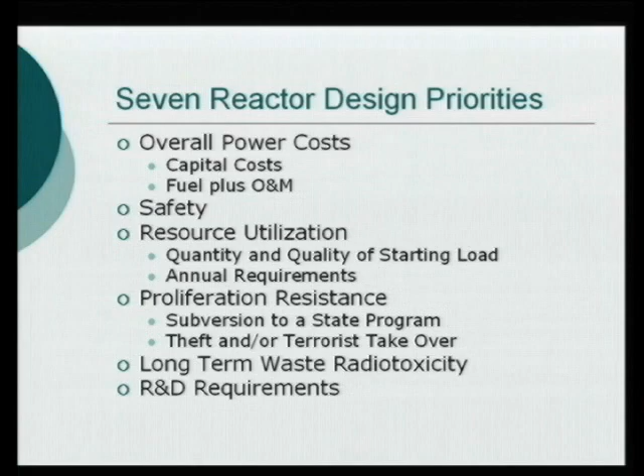How much R&D is required for a new design or getting a design up to code? And then what is the capability for rapid deployment? We need a lot of reactors. What can we do for that?

So the existing reactors, light water reactors, pressurized water reactors, boiling water reactors, and CANDUs - overall costs, they're very high, but arguably competitive with coal. The safety is good through expensive engineered sort of defense in depth. Resource utilization is moderate for startup. They're not too hard to start up, but they're very poor annually, and you need a lot of uranium dug out of the ground to support these.

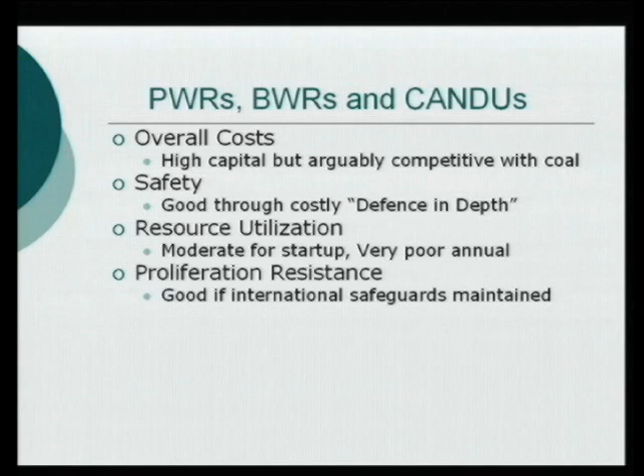Proliferation resistance is good through all the international safeguards we've set up. Long-term waste is very poor, especially the once-through cycle, which is the most economic and widely used. Very, very poor, sending a lot of radiotoxicity to waste. Even if they use plutonium recycle, that doesn't really improve things dramatically.

R&D, that's one area they benefit. There's very little that is required. Capability for rapid deployment, it's just not there. Even on labor alone, we couldn't get too many build programs going to really get enough of what we need. What about gas-cooled pebble bed reactors?

This is an area seeing more advance in recent years, and it is an interesting system. There's cost savings possible, but no real great reduction in overall complexity. They require a massive pressure vessel, and that really limits the size of the core and the power. So almost the same size pressure vessel as a pressurized water reactor for maybe a quarter of the power or even less.

The rad waste production is very similar to light water reactors, and also you've got radioactive graphite. It's not too horrible of stuff, but you've got that as an added bonus. The reprocessing of fuel in this design is extremely difficult, and that's part of the reason they say they're more proliferation resistant, but that means the uranium utilization has an even worse outlook.

From a safety outlook, they are excellent in decay heat management. They can get rid of decay heat quite readily, but that's only half the equation in reactor safety. The other half is criticality events, etc. And they're quite good on this, as any reactor is by engineered systems, but that is still a possible issue.

I have an asterisk here, with some extra comments below for people reading the slides later. One of the asterisks is that the reverse is true for accelerator driven systems, where you're keeping things subcritical by supplying neutrons from an accelerator. Yes, we can instantly shut that down. It helps a lot in criticality, but it does nothing for you in helping with decay heat management.

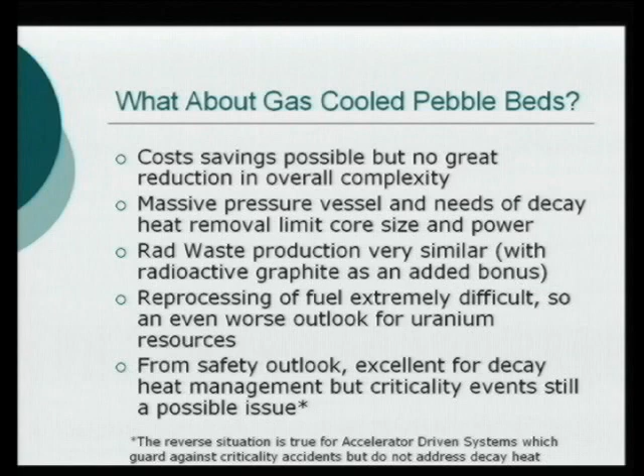What about the other Generation IV reactors? Generation IV, just briefly, was a program set up around 2002, a worldwide program to investigate what reactors we should be working towards in the long term. Pebble bed reactors was one of those.

Another is supercritical water, operating water at a much higher temperature than they're using now. It really only gives modest improvements, gives the thermal efficiency up a bit, but extremely challenging corrosion issues to solve there.

Sodium cooled fast breeder reactors have been around for a long time, with a few smaller ones or demonstrations built. In general, most would agree they're more costly and have higher safety concerns. We can make pretty much any reactor safe to the public as long as we have a nice containment vessel around it, but many would argue that these type reactors are more likely to have accidents.

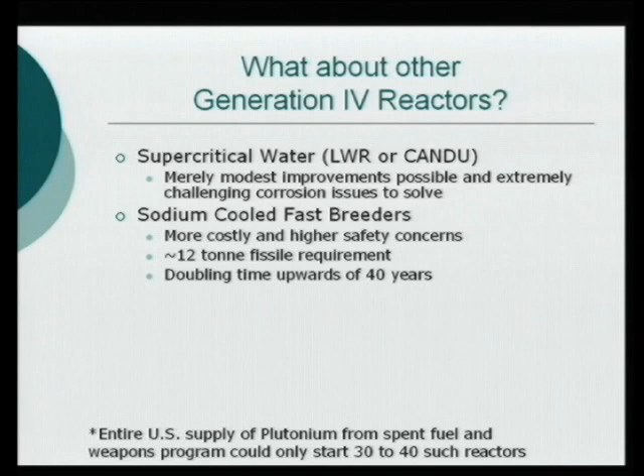They need a massive amount of fissile material to start, 12 tons of fissile material, plutonium, etc. And the doubling time, how long it takes if you breed fuel, meaning you're making more than you're consuming, would take 40 years on these designs to make enough for the next plant, so to speak.

Lead-cooled fast breeder reactors have some possible savings, they save an intermediate loop, etc., but they require even more fissile material. So I have an asterisk here that with that, like the entire plutonium supply of the U.S. weapons program, spent fuel, etc., that would only be enough for 30 or 40 reactors, so it really limits how fast we can develop these.

Gas-cooled fast breeders, that's one of the other Gen 4 reactors. That has a lot of similar issues here.

Now, what about thorium? We keep hearing about that. Thorium is more and more in the news, more and more in the conversation of the nuclear industry. Thorium is fertile on its own, but it can produce a fissile element, uranium-233, which is a really good nuclear fuel. It has numerous advantages, works well in any spectrum. We don't have to have a fast spectrum, or slow the neutrons down, like the uranium-plutonium cycle.

However, any use in solid fuels involves very difficult fuel processing. There's a lot of inherent radioactivity in things. It's very difficult to reprocess.

But what about fluid fuels? And what about the Generation IV reactor that was made for thorium? That is the liquid fluoride reactor. It's over 50 years old, but it's never really looked any better. And historically, this is called a molten salt reactor. I'll probably be switching a bit between terms here.

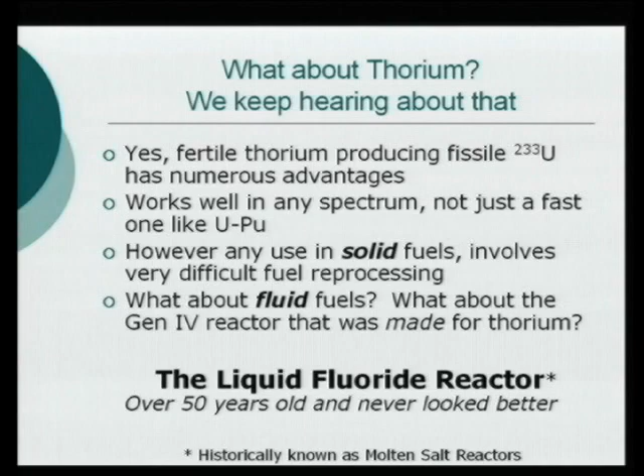The older term is molten salt reactor, but liquid fluoride thorium reactor, or LFTR, is a term that's becoming more used. So, liquid fluoride molten salt overview.

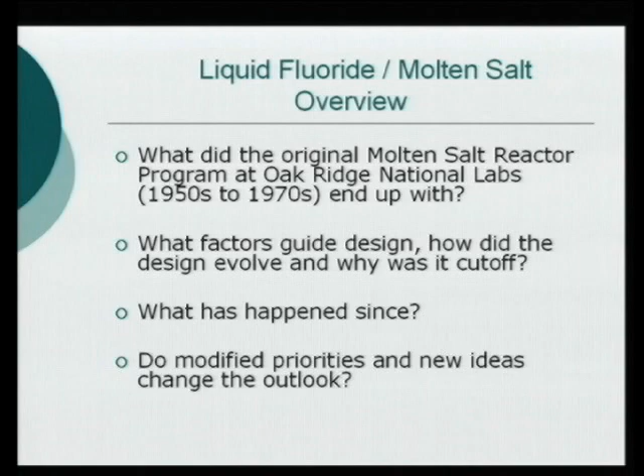What did the original program at Oak Ridge end up with, and what factors guide design? How did design evolve, why was it cut off, what's happened since then, and do new priorities and new ideas change the outlook of things?

Looking at what's called a traditional molten salt breeder reactor, this is a figure right out of the Generation IV program. Molten salt contains the fuel itself, and the fissile and fertile material flows through a critical core that has graphite logs, flowing between the logs, in and out of that core. It's only critical inside the core, so heat is generated in here, but that hot fluid comes out and goes through an intermediate heat exchanger.

That secondary coolant salt then drives either a gas cycle or a steam cycle. Originally it was a steam cycle, but we feel a gas Brayton cycle would be much more useful now. We show control rods here, but I'll talk a little later - you don't really need control rods in these types of reactors.

We can process out fission products to be able to be a breeder, or as I'll show in a few minutes, a break-even breeder. We can also dump these salts to emergency dump tanks very easily, either by valves, or if we do nothing else, we have freeze plugs that will melt if the salt starts to get hotter than we want, and drain to tanks that are set up to deal with the decay heat.

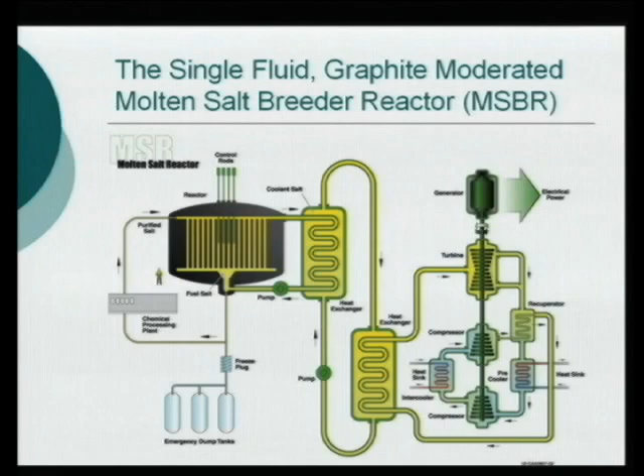When you shut a reactor down, that doesn't turn off all the power. There's so much radioactivity going on that there's a lot of power being generated, and we have to deal with that. That was the Three Mile Island event - the reactor was shut down, but they had to deal with that decay heat.

So the general attributes of this traditional design - it's called a molten salt because you have a mixture of, in this case, the fertile thorium fluoride and uranium fluoride mixed in a carrier salt of lithium fluoride and beryllium fluoride. That lithium has to be isotopically enriched, which makes it a little expensive, but not too bad.

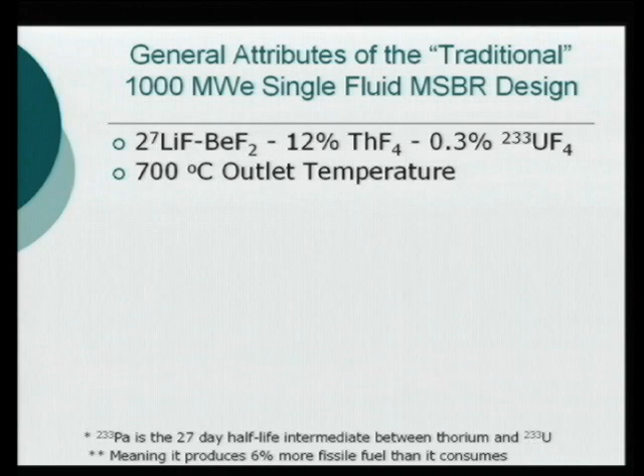It has a nice high outlet temperature of 700 degrees, so we have a nice high thermal efficiency. Oak Ridge work was over 44% on the steam Rankine cycle. If we switch to a gas Brayton cycle, like helium or even supercritical carbon dioxide, we can get up to the high 40s. The fission products in this case were removed on a 20-day cycle.

Some were moved a little quicker, some a little slower, and I'll talk in a minute about how a lot of them come out automatically. Now protactinium is sort of the intermediate between thorium and uranium-233. Thorium becomes protactinium-233, and that will decay to the thing we want, uranium-233, in a 27-day half-life.

We often need to remove that protactinium for this design, which is a bit of a problem here - you want to take it out of the neutron flux so it doesn't take another neutron and fail to become what you want. I'll talk more about that a little later.

It has a very low fissile inventory. We talked before about like 12 tons, 20 tons - this is only 1.5 tons, or 1,500 kilograms, for a typical gigawatt or 1,000 megawatt size plant. It has a breeding ratio of 1.06, which is modest compared to the fast breeder reactor, but you don't need to breed much fuel to start your next reactor.

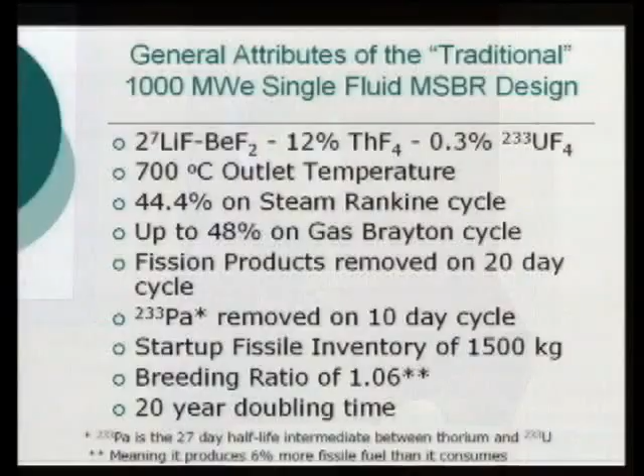So the fuel you burn in a year, which is about 800 to 1,000 kilograms, you sort of end up with 6% more than that at the end of the year. That gave a 20-year doubling time, which back when it was in competition with fast breeder reactors was not as good as the fast breeders - but we had to change the fast breeders later for safety reasons, and they're nowhere near as good as 20 years anymore.

General benefits of any molten salt design: volatile fission products, gaseous fission products, things that want to come out of the salt will come out as we're operating, and we simply collect them. The most important thing is xenon - it's a gas that really just loves to absorb neutrons.

We really want to get rid of that—it's quite radioactive, so we remove it. It just comes out of the salt, and we assist that by bubbling helium through the salt. So if everything that wants to come out of the salt we take out continuously and store safely off plant, away from the reactor, if there is any kind of major spill it just solidifies. There's really nothing that wants to come out of there, so it's hard to imagine ways we could really spread any radioactivity around.

The salts have a very high boiling point, and we operate them at low pressure—there's no pressure vessels here whatsoever, it's just a big tank basically. Any temperature increase instantly lowers the reactivity, which is a very good safety feature. The fuel salt's at the lowest pressure of the circuit, which is the reverse of a pressurized water reactor, where at every stage things are trying to get to the outside world, whereas here the radioactive salts are at the lowest pressure of the circuit.

We don't need control rods or burnable poisons, etc. There's almost no excess reactivity, so there's no danger of accidentally pulling out control rods—there's none in there to begin with. And we have that simple freeze plug that melts upon overheating and just drains things. So there are lots of inherent safety features here.

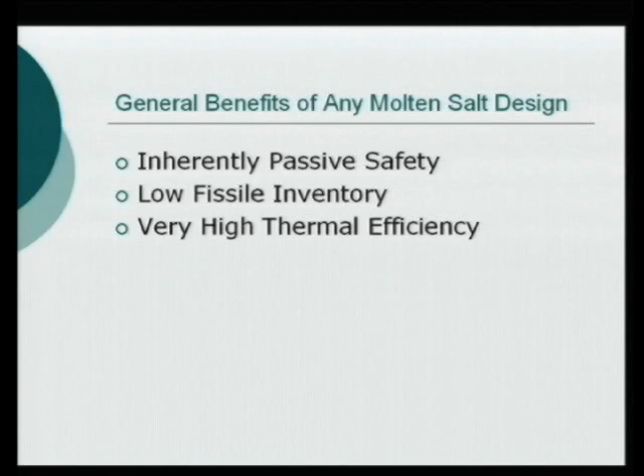So the general benefits: inherent passive safety, low fissile inventory, very high thermal efficiency, and they're ideal for dealing with TRU, transuranic waste. We can get rid of the more nasty aspects of those, which I'll show in just a second—they're a perfect system for that. It's very hard to get rid of transuranic waste in other designs.

And when we have the ability to use the closed thorium cycle—just very briefly, thorium becomes U-233, and U-233, when it fissions, can give a little bit more than 2 neutrons per fission. And if we don't waste too many of those neutrons, at least one of those neutrons can go to making another U-233. And if exactly one goes, we break even, and we're creating as much fuel as we're burning, so to speak.

Thorium is dirt cheap, extremely plentiful. So if we can close the cycle here, we get down to about 800 kilograms a year. That's maybe $40,000 to $50,000 worth of thorium for a plant that's generating revenues of maybe $500 million a year worth of electricity. So it's just a drop in the bucket.

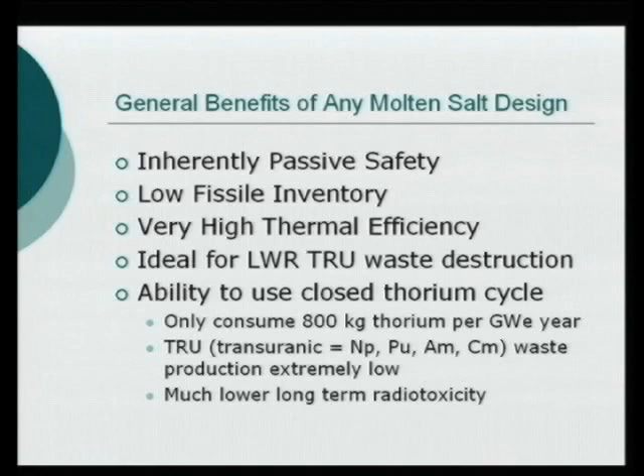The transuranic waste in general is produced at a much lower rate, and it's much easier for us to just keep burning those off within the reactor, so we get a much, much lower long-term radiotoxicity. That's what I want to talk about for a minute now.

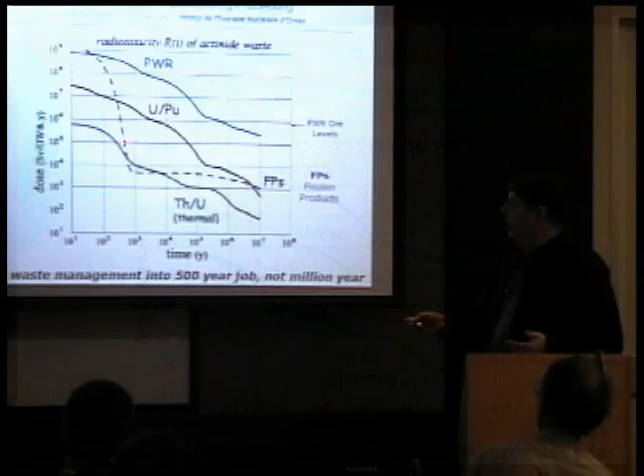This green line shows what we can get with a molten salt reactor, or liquid fluoride. We're not producing much—we only have maybe 10 to 20 kilograms in the salt at any time. So when we reprocess, we put that back in. Now, anytime you process things, you have to assume you might lose a tiny bit, and 0.1% loss is a very conventional rule of thumb for losing things to waste. But since we're only processing kilograms per year, we get a very low radiotoxicity.

Whereas a fast breeder reactor, even with the same loss rate, they're processing tons per year, so they will not be that great. Now, they hope they can do even better than 0.1%. In practice, especially the more famous integral fast reactor, they've probably never really done much better than 1%. They hope they can do a lot better than that, but they're starting with a lot more

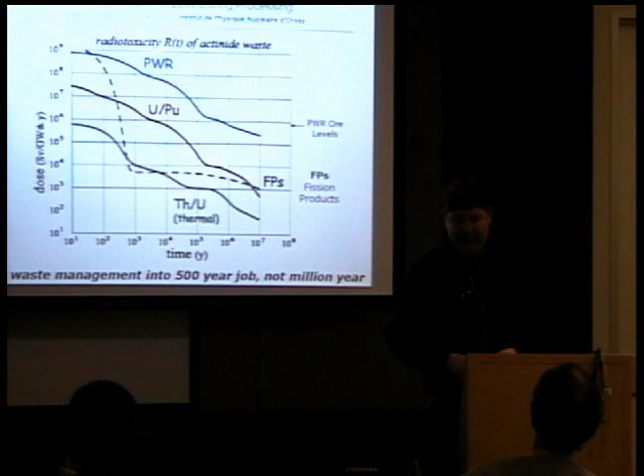radiotoxic actinide waste to begin with. So it just shows that with a molten salt reactor, where we put the plutonium, etc., back in the reactor to keep burning it off, we're turning the waste problem into more of a 500-year problem than a million-year problem. And we can engineer things that won't leak for 500 years quite easily, as opposed to trusting that we can do that for millions of years.

Now, proliferation resistance—that's a very important question, and a lot of people have different opinions on this, but it's an extremely important one to talk about.

On the pure thorium to U-233 cycle, there is a lot of proliferation resistance built in already. There's always going to be a lot of an isotope called uranium-232. It's got a moderately long half-life, so it sticks around, but it gives a really strong gamma ray from one of its daughter products. That's really hard to shield. It makes it very easy to detect if someone's trying to smuggle it around. You can't really shield that out—it's such a high energy gamma ray. This makes illicit use extremely difficult and highly detectable.

There's never been any national program based on making weapons out of U-233, even though yes, it's technically possible. And it would also be extremely hard to imagine how you could steal from reactors where the salt's never less than, say, 500 degrees Celsius.

A colleague of mine, Kirk Sorensen, also made a great suggestion here: if you're using the pure cycle in a molten salt reactor, a liquid fluoride reactor, we can instantly denature that. Uranium-235 or 233 are both materials that can be used in a weapon, but if they're mixed with enough uranium-238, natural uranium, they can't be made into a weapon.

So we could keep uranium-238 as a fluoride on standby, and if anything goes wrong—inspectors lose contact with the reactor—that can very quickly be dumped into the salt, making it useless for weapons, and you can't really start up the reactor again.

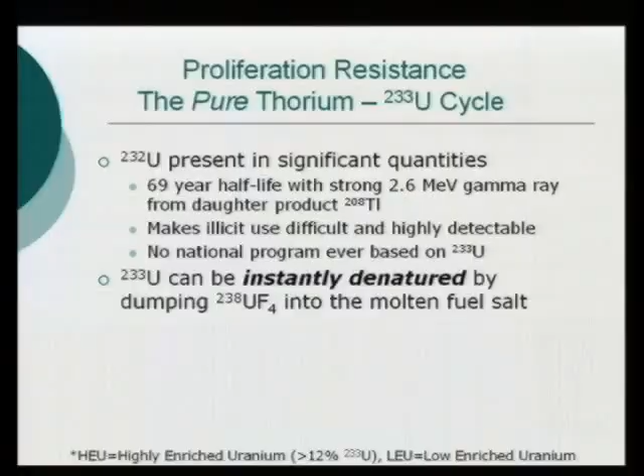Now, protactinium removal can lead to clean uranium-233, so if we can, we really should try to avoid this. Because if it's becoming U-233 just from storage of protactinium, it doesn't have this U-232, or very, very little of it.

So that's an important point. There's only very small amounts of plutonium in this cycle, and it's extremely poor quality. You could really never make a weapon out of it.

Now, we can also denature these cycles, meaning we run them with enough U-238. We still want to be majority relying on the thorium part of things, but we put in enough U-238 so that any uranium you could take out, you couldn't really use to make a weapon.

Because the pure cycle does represent what people call highly enriched uranium, and for a lot of people, as soon as you say that word, it's a no-go. So running the denatured cycle includes having enough U-238, and it does mean there's more plutonium present, because that U-238 can start becoming plutonium by absorbing neutrons. But it's still very poor quality, and plutonium is a lot more difficult to remove from the salts than uranium is. In many designs, it will also affect your conversion ratio.

Conversion ratio and breeding ratio are sort of the same thing—it's how much fuel you're making per fission.

So looking at the quality of produced plutonium, weapons grade is almost all Pu-239. Reactor grade is only about 60% that. One of the basic things that gives a lot of protection here is that Pu-238 generates a massive amount of heat because it has a fairly short half-life. In reactor grade, it's 1.3%, which makes it very, very difficult, but not impossible, to make a weapon out of reactor grade.

For a denatured molten salt cycle—and this is from what we call a 30-year once-through converter design, which I'll talk a lot more about later—it has massive amounts of this Pu-238, and a lot less 239, etc.

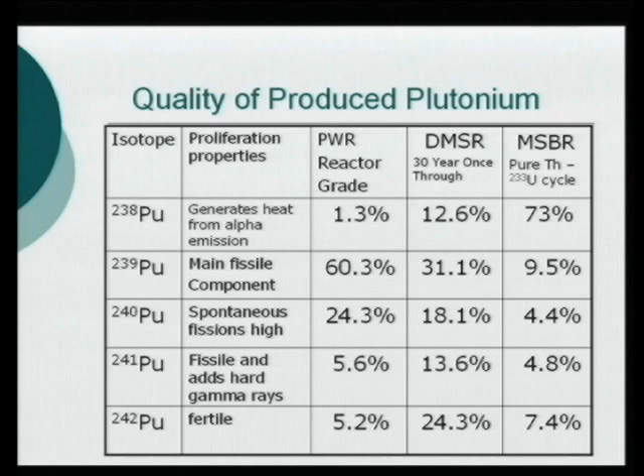Technically, it would still need to be guarded, but it would be next to impossible to make a weapon. On the pure cycle, you do have U-233, but the plutonium produced is basically worthless—it's almost all Pu-238. The material would probably melt if you tried to put enough together to make a weapon.

Now, some problems specific to the single-fluid molten salt design, where you mix thorium and uranium in the same fluid, graphite moderated. They had a fairly high power density, and graphite has a limited lifetime depending on power density—about 4 years—so we have to replace that graphite every 4 years. Fuel processing is also hindered by the chemical similarity of thorium and the most important rare earth fission products that need to be removed. There was also a problem with the temperature reactivity coefficient that was recently discovered.

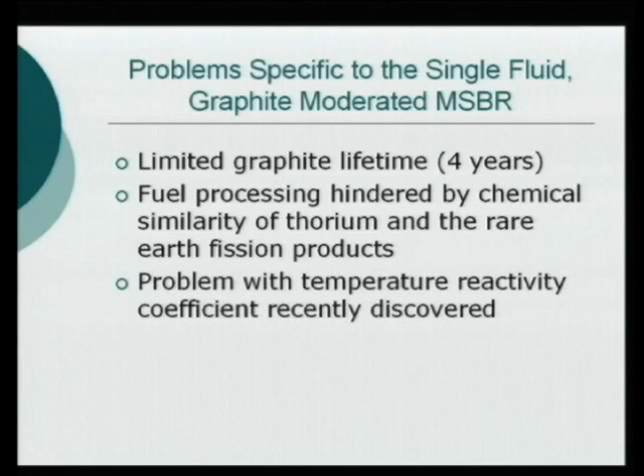It's quite simple to work around, and no problem with some of the ideas I'm going to talk about today. Protactinium separation does add a unique proliferation concern, which we'd like to get rid of if possible.

Some design basics: two-fluid versus single-fluid. Single fluid is what we call traditional, but for most of the Oak Ridge program they were trying to do the two-fluid design, where you have a separate fuel salt containing the uranium-233, maybe a little thorium, but by definition the two-fluid has none, and then a blanket salt that contains the thorium, catching neutrons to convert fuel for you. The advantage is that with no thorium in the fuel salt, it's much easier to process for fission products.

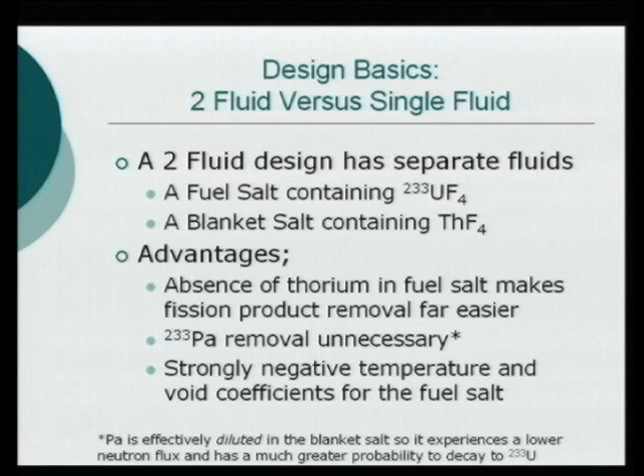PA removal is not really necessary here—there's an asterisk I'll describe. How many neutrons you lose to protactinium depends on power density, your neutron flux. The thorium, though, sits in a much lower neutron flux, or we can just have a lot more blanket salt, effectively diluting it, so we lose a lot less. There's really no need for protactinium separation, which is a pretty complex thing to do.

It has a very strongly negative temperature and void coefficient for the fuel salt, which is also very good. There are also converter, or once-through, designs where we're basically just mixing low-enriched uranium—uranium that can't be used to make a weapon—with thorium in a single fluid. There's no need for any processing of the fuel salt whatsoever for the entire life of the plant.

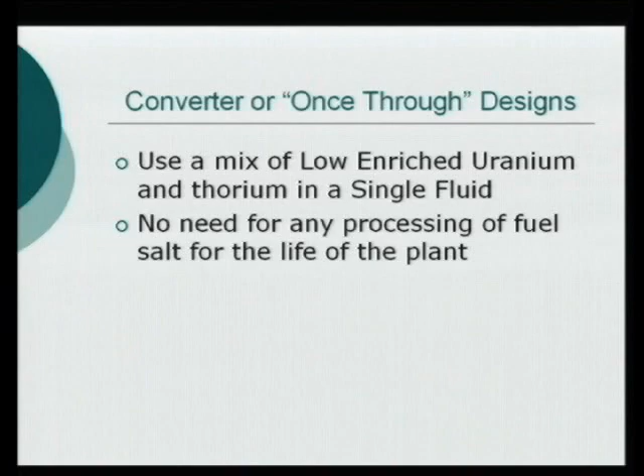We're not able to break even—we have to dig up more uranium every year—but much, much less than other conventional reactors. Just on design basics here: choice of neutron spectrum, a harder, faster spectrum, because we can modify this almost as much as we like.

With a harder spectrum, losses to fission products will drop, so we can maybe leave them in much longer. Prompt neutron lifetime is shorter, which is a bit of an issue for control, and it typically requires a higher fissile load to start these up.

A softer spectrum is basically the reverse: we can get that fissile inventory really low, but losses to fission products are higher, so we might need to remove them quicker. We can't really have any extra structural material—most designs don't have any at all, just graphite and the salts, and graphite is very good with neutron absorption. The prompt neutron lifetime is much increased, so things can happen slower here.

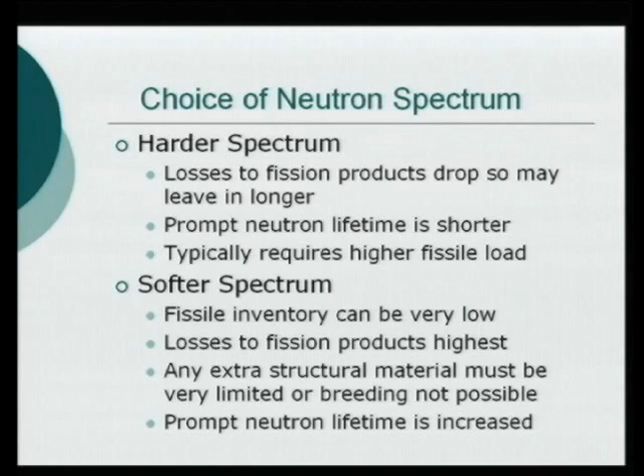Fuel processing basics: fluoride volatility is a process that removes uranium from the salt—a very simple process. Fission product removal is essential if we want a breeder or break-even design, but even for break-even we can go several years. Some French studies have shown up to 20 years before removing fission products. Protactinium removal and hold-up is essential for single-fluid designs that wish to break even, but not really for others.

With fluoride volatility, we simply bubble fluorine gas through the carrier salt, and it converts UF4, which is dissolved in the salt, to gaseous UF6 that we can convert back later. It's an old process we've known about since the 50s.

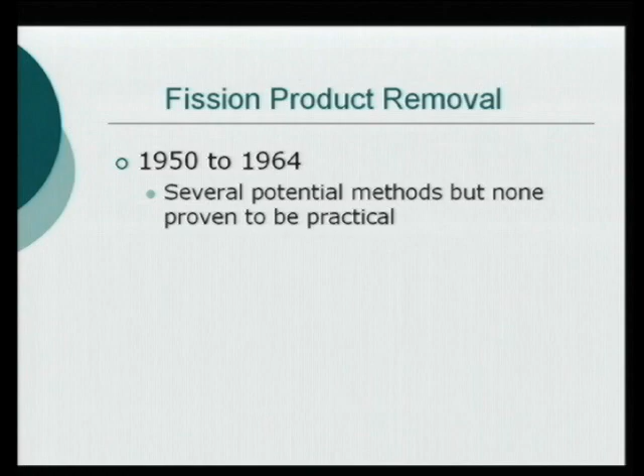For fission product removal, historically in the early part of the program from the 50s to early 60s, they didn't have any one method they thought was great—they proposed many, but none yet proven practical. There was a big breakthrough in 1964 called vacuum distillation. It's a very simple system: every day you take a little bit of the salt away and put it in basically a still.

The fission products themselves give enough heat to keep it really hot, and the carrier salt will evaporate away. Before you put it back, you take any uranium out, then evaporate out the carrier salt, recombine those, the fissile U-233 and the carrier salt, and put them back in the core. That gets rid of most of your fission products, and especially your rare earth fission products.

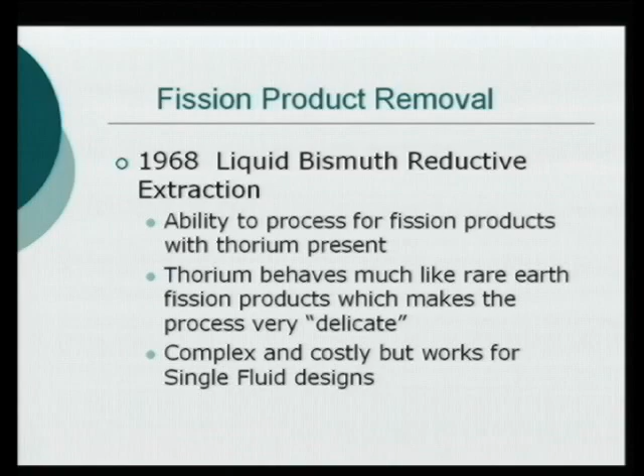The problem is if there's thorium in that salt, it's going to stay with the fission products. So this was really only viewed for a two-fluid design. Later, in 1968, they developed something called liquid bismuth reductive extraction. I won't get into details, but it does have the ability to process the fission products with thorium in the salt. But thorium is so chemically similar to the rare earth fission products that it makes the process very delicate, requiring many stages to do properly. So it's a complex and costly system, but it does work for single fluid designs.

So, fuel processing summary here. For two fluid design, we've got all kinds of choices. We can use vacuum distillation, something called salt replacement I won't get into, or the liquid bismuth extraction, much simplified to one stage because we're not worried about that thorium. We can also skip protactinium removal altogether because it's in that lower neutron flux blanket. For single fluid designs, you're sort of stuck with one method, and it's hard not to get into protactinium removal. If we have converter designs, or burner designs, we've got no fuel processing whatsoever, just simple chemistry control.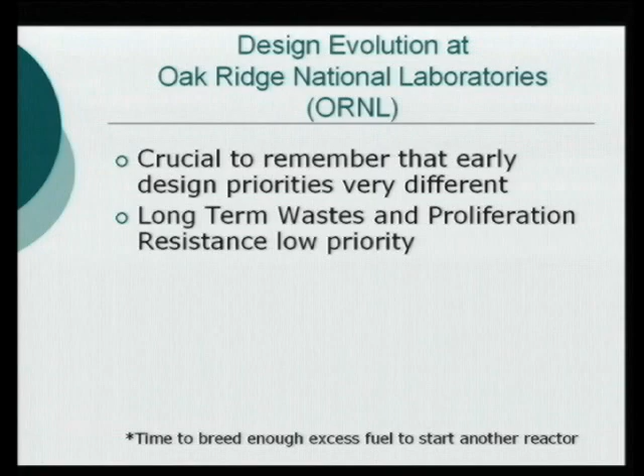Looking at the evolution here, it's crucial to remember they had very different design priorities in the early days. Long-term radioactive waste and proliferation resistance weren't really part of their mandate - they didn't have too much concern there. Back in the 50s and early 60s, they really thought we had very little uranium in the world and would run out quickly, so we had to get breeder reactors going and breed enough fuel to expand the fleet. They thought they'd have thousands of reactors worldwide by now. That meant short doubling time - how long it takes to breed enough fuel for your next reactor - was a very top priority.

The molten salt reactor program was in competition with sodium-cooled fast breeders, and back then they thought they had a really good doubling time. They don't think that anymore, for safety reasons.

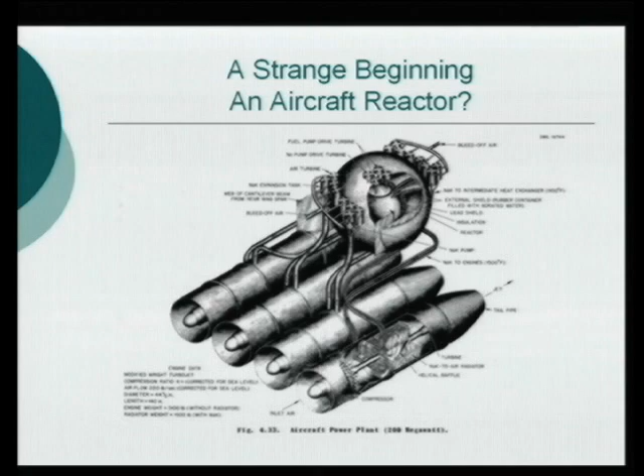Looking at the program, the strange beginning of this was an aircraft reactor. They didn't make anything that flew, but just as the Navy was sort of the birth of the light water reactor - the pressurized water reactor that was the best thing for a submarine - they thought a molten salt reactor would be a great way to have a bomber that could fly around for months on end, replacing combustion heat so there's no jet fuel on board. Extremely challenging project, to say the least.

It did lead to a very interesting test reactor built in the 50s, with very high temperature operation at 860 degrees. It had beryllium oxide as a moderator, sort of canned in material, and a different carrier salt, sodium zirconium fluoride. It pointed the way to possible power reactors, though even the original idea was probably quite far-fetched, in my view at least.

Now, what I call the rise and fall of the two-fluid reactor. Two-fluid was the focus for most of Oak Ridge's program, and in the late 50s they looked at what we call homogeneous designs - no graphite or anything, just the salt itself. They looked at both converter designs and breeder designs. The carrier salt does provide a significant amount of moderation, slowing those neutrons down, so we can actually play around with the spectrum quite readily. All these studies used spherical geometry, and they always had a wall, a Hastelloy N.

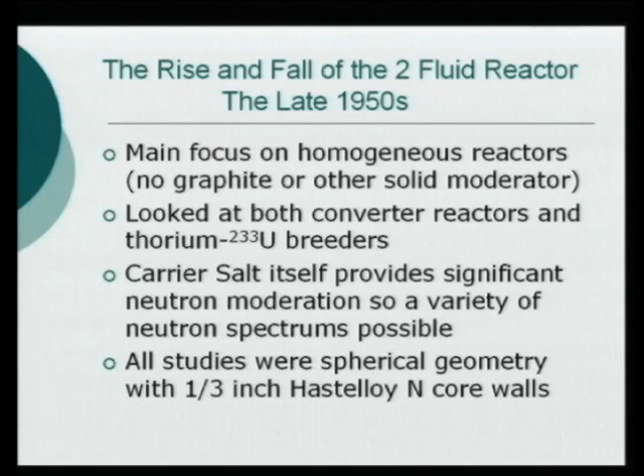Maybe we can improve the alloy, but nonetheless, a very nice little design. In the early 60s, though, they proved that we could use graphite with these systems, and that can lower the fissile inventory, so there was a switch in focus.

Okay, we're going to go to graphite moderation, but we still want that two-fluid design because it's so much easier on processing the fission products. Now, the simplest way you might imagine building this is a central core that just has the fuel salt surrounded by a core that has the blanket salt. The problem with that, though, is the critical radius of that inner core would just be too small. It would be on the order of about a meter with the concentrations of fissile that we would put on these salts. That's just too small, not enough volume to have a power-producing volume.

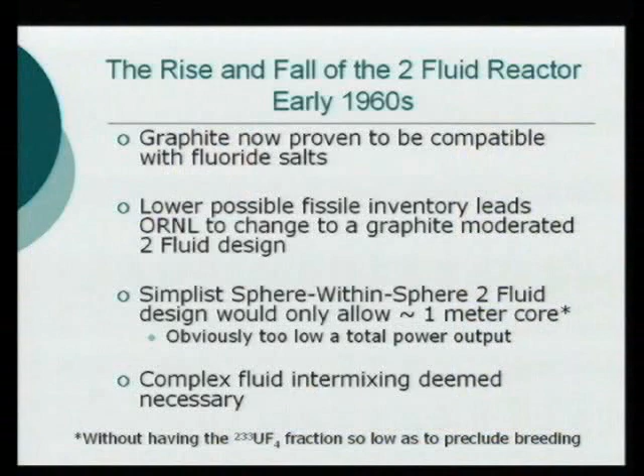So Oak Ridge's solution was, well, we're going to have to mix these salts, not together, but have two salts in the core separated by plumbing, graphite plumbing. Now, that intermixing of fuel and blanket salts done by graphite plumbing does give you the ability to have large core diameters and adequate power production, but that graphite, when it's under neutron radiation, first shrinks a little bit and then starts expanding. And that's changing the ratio of the blanket salt and the fuel salt. It's just giving all kinds of problems. And that plumbing was so complicated as well, any sort of one crack would basically mean replacing the whole core.

They have found some issues with that hastelloy, that high nickel alloy metal. One with a certain fission product that was getting into the grain boundaries, and another with neutrons that can make helium inside the metal, and that helium gets to grain boundaries and gives you problems. But later on, they worked with alloys and mostly resolved those issues, though not 100%, and we could definitely do more now.

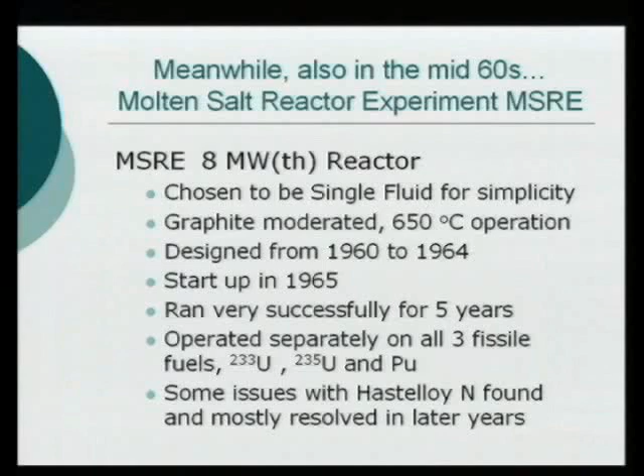Now, 1968 is what I call the start of the single fluid era. That new extraction method, even though they knew it was going to be quite complex and quite expensive, not as expensive as solid fuel processing, it works with thorium in the salt. The two fluid concept was abandoned, and that plumbing problem was left unsolved. Pretty soon after that, major funding for the molten salt breeder reactor program was canceled, and the R&D extremely limited until quite recently. And this two fluid concept was largely forgotten.

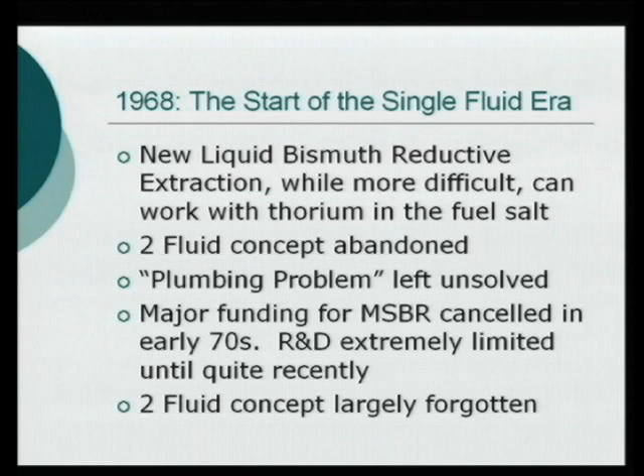Now, why was the program canceled? This was obviously going to be speculation. There's a lot of reasons here. First off, what did Oak Ridge do right? First off, they looked to go to the thorium-uranium cycle instead of uranium-plutonium. That's the fast breeder cycle. There's no need for a fast spectrum, a lot less radiotoxicity, etc., a lot more resources of thorium. They brought all the top minds together in one place.

Fast breeders and a lot of the other designs were working sort of piecemeal, some at Argonne, some other places. Everyone was together in Oak Ridge working to this. It really reinforces all the efforts. And they kept reactor safety at the forefront. There's inherent safety features of these as opposed to engineering safety. In Oak Ridge, they had a lot of voices in the early safety discussions saying we have to really be worried about events of low probability.

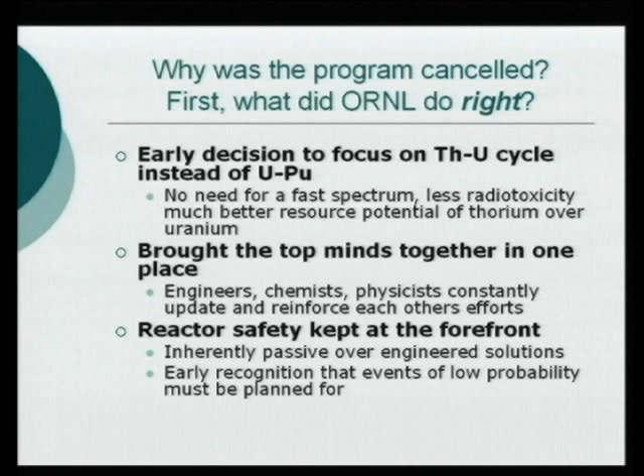What did Oak Ridge do wrong? Well, it turns out it's a lot of the same things. They decided to focus on the thorium cycle, but in the 50s to the 70s, production of plutonium for the military was a top priority for the government as well, and by extension, the Atomic Energy Commission, which controlled reactor development. They brought all the top minds together in the same place. That meant that all around the country, elsewhere, Argonne, everywhere else, they really knew very little of the molten salt program, and government relies on the opinions of experts from around the country.

Reactor safety kept at the forefront. Alvin Weinberg was the director at Oak Ridge, the inventor of the pressurized water reactor actually, and he raised the ire of AEC's infamous Milton Shaw by raising safety concerns about pressurized water reactors.

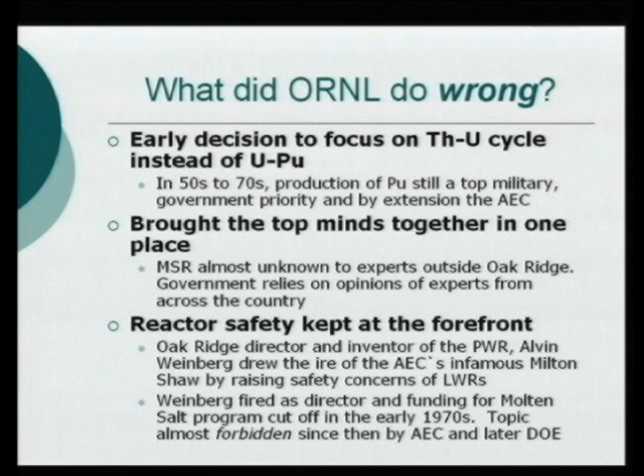Soon after that, he was fired as director and the program was canceled. Not necessarily that those two are directly related, but most people feel it is.

What's happened since then? In the late 70s, Oak Ridge kept things going with almost no funding, so not much good engineering work was being done. They started to focus more on denatured designs with U-238 present, either as converters or breakeven systems. They showed, even surprising themselves, that you could break even with a design that had U-238 present, so the uranium was useless for weapons. There's been little funding, but many vocal advocates worldwide, doing things on their own without much support.

Until it was chosen as one of the 6 Generation IV reactors back in 2002, which really sparked a lot of interest.

Probably the biggest work for the last 5 years has been in France. There's a large group there doing great work on modeling, chemistry, etc. They found a reactivity problem with the early 70s design. I'll briefly explain: you get the temperature coefficient as the needed negative term instantly, but as the graphite lags behind and warms up, if the reactor starts getting hotter, the graphite eventually brings that coefficient to be positive. That's a problem we need to fix, and what I'm going to talk about in the future—definitely we can fix that.

They looked to decrease the processing needs. They realized how difficult liquid bismuth extraction is, so they allowed the breeding ratio to drop down to breakeven. They've moved towards a harder spectrum that doesn't have graphite in the core itself, and they've also added a blanket salt radially around it.

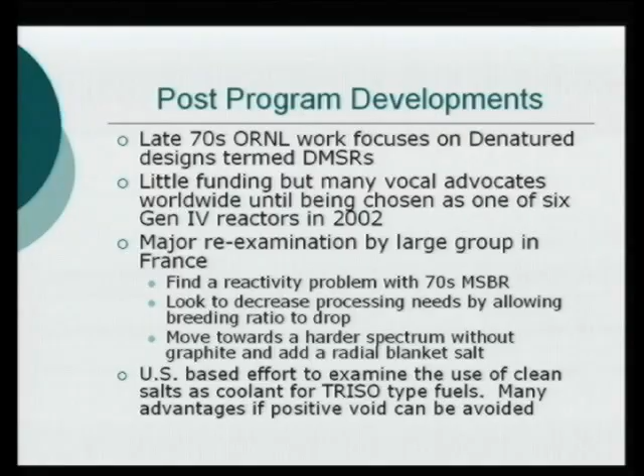There's been more US-based efforts, but a lot of the focus has shifted from molten salt reactors to what they call molten salt cooled reactors—traditional solid fueled reactors based on TRISO fuel, where the fuel is inside tiny beads within pebbles or prismatic fuel elements, using molten salts without any fuel in them, just as clean carrier salts. A lot of people hope that effort can lead to pretty good reactors now, and eventually to more ideal molten salt fueled reactors, but it has taken away some of the interest here.

In those designs, the real big challenge is making sure you don't have what's called a positive void coefficient. They can do that, but it's a really hard, really big challenge. There's also been much work worldwide on using these systems to get rid of transuranic waste—taking away plutonium and neptunium, etc., from light water reactor spent fuel and burning it up in these reactors.

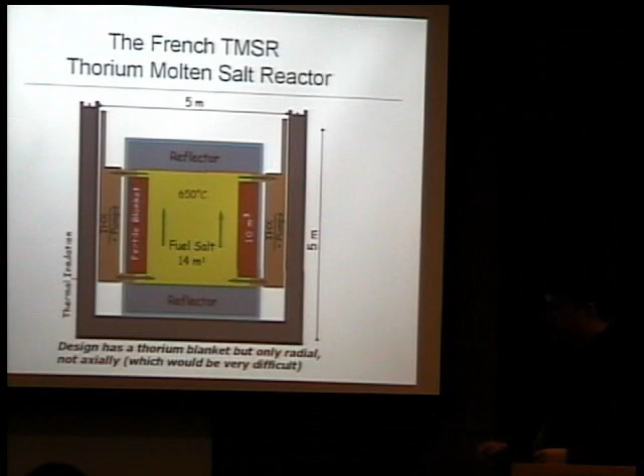Now the French design—just very quickly, this is what they've evolved to. It's a very simple core of fuel salt surrounded by a radial blanket. Some engineering details they haven't gone into much, like how they're going to have a barrier and so on. There's a reflector on top and bottom; you can't have just pure graphite there, it would give too big of a power spike, so I think they're still working on what material that reflector will be. It's a very simple design, but it would be quite difficult to build an axial blanket as well. Because it's not a completely encompassing blanket, that really limits their potential a great deal.

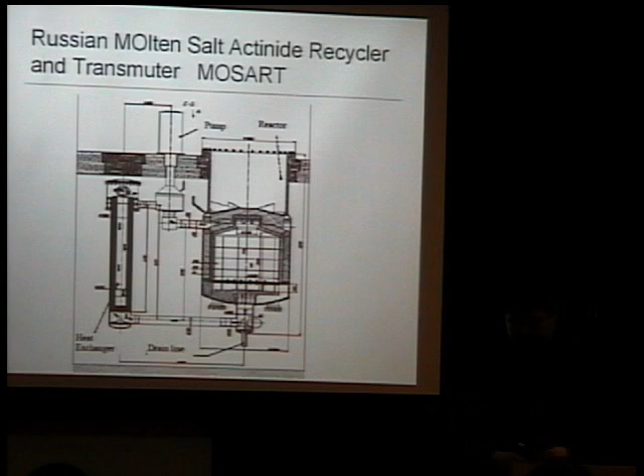A lot of good Russian work has been done too. They're working mainly on a system that just burns transuranic waste—no thorium, uranium, or anything else in that reactor. They just keep feeding in waste transuranics from spent fuel, and it's just a simple big tank of salt. To protect the outer vessel from too many neutrons, they'll put a graphite reflector there, and even some steel, to limit how many neutrons reach that outer vessel. They've been doing great work.

Updating priorities—if we're trying to look ahead to what we should be doing, what we could be doing: fissile material for starting up, mainly because these reactors need so little and we can use many different types. We can use transuranic waste, whereas light water reactors can't put everything in, only plutonium, and they can't just run on plutonium either—they need uranium there as well.

So we don't really need to breed fuel. Proliferation resistance and long-term waste reduction, that's a much higher priority now. And we should really try to minimize the need for fuel processing and its complexity. Ideally, remove it altogether if we can.

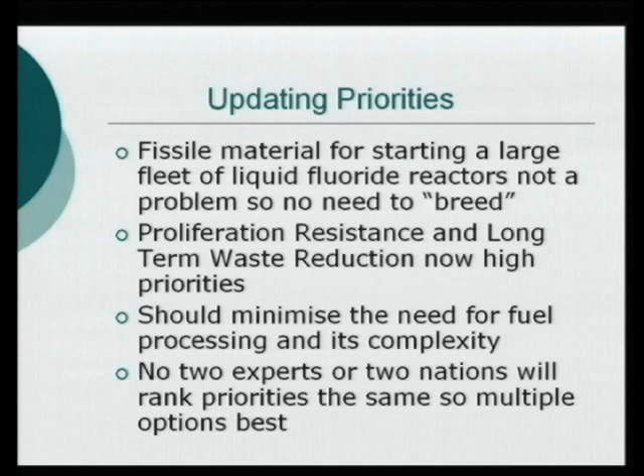But there's no two experts or two nations that are really going to agree on ranking all these different priorities and how different reactors fit into those priorities. So it's probably very good if we go forward on multiple options. There's a lot of flexibility in these designs. And keeping in mind a few design concepts here: keep it simple, stupid. A lot of people are trying to think of new designs.

Idea people are often drawn to very complex solutions, but any new improvement in the nuclear field can be monumentally expensive. So we really have to choose our battles, make sure any changes we're making are relevant, needed, and easy to verify. Off the shelf where possible. There's a lot of good examples to this.

There's a lot of advantages to going to a gas cycle to get the final energy out of these, but there's a lot of R&D involved in trying to match a gas turbine to what your reactor is. So a lot of people are still saying, well, we'll just stick to the steam cycle. So there's a lot of cases like that.

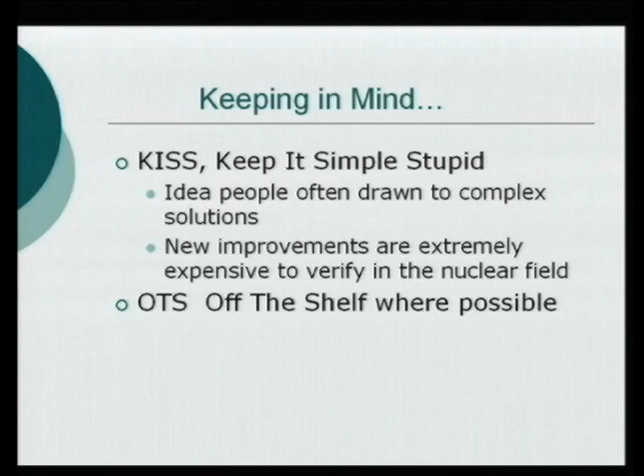Another aspect is we have a certain temperature we can reach with the metals that we work with, about 700 degrees Celsius. If we stick to that, we sort of know our limitations. There is some advantage to going higher, but then it opens up all these things that we'd have to verify, et cetera. And also an expression, hopefully most of you understand: rice bowl breaking.

Whenever you're talking about a brand new idea, you're going against people whose livelihood it's affecting, breaking their rice bowl. You've got to keep that in mind, and be aware of that and minimize it if possible.

A good example is if we're going to the pure thorium cycle, we're basically removing uranium from the industry, and that's a pretty established industry. Just keep that in mind—but maybe if we can do just as good with the uranium, keep that in mind too.

And also remember that there's a lot of existing corporate players, et cetera, that have models in place. We're going to be going against those, or maybe we should be bringing in those players, because they're not doing too well with their designs. So some new ideas for your consideration that I've been working on and patenting, et cetera.

One is reviving the two-fluid concept—that's the main thing I want to talk about. Another is what I call a barrier-free design, and a possible fuel processing-free design—not as important an aspect, a little more theoretical, something I haven't made public yet, so it's sort of a public disclosure here. And then simplified converter design, starting with what Oak Ridge came up with and trying to expand on that.

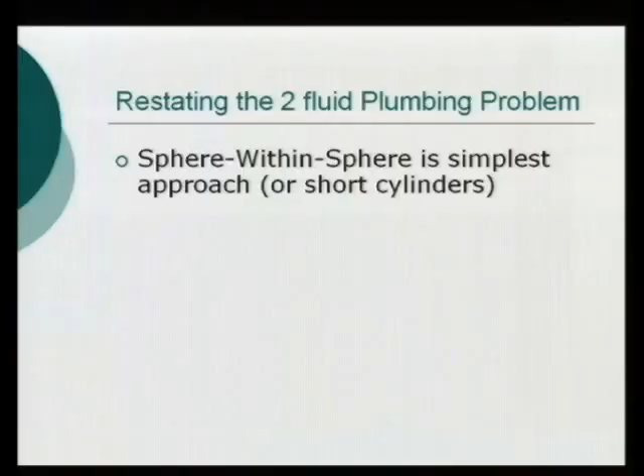Getting into the two-fluid ideas first, restating the two-fluid plumbing problem: a sphere within a sphere, like fuel salt with graphite or without, surrounded by blanket salt—that's the simplest approach. But if there's no thorium in that inner fuel salt, the critical radius is just too small. It makes your reactor too small, not enough volume to get enough power. So it's too small for power plants.

The standard conclusion is, well, we have to find some way to interlace those two fluids. So what's my solution? First, starting with a hint—you can ignore the math here—what's called the buckling ratio just shows that if you have different geometries, a sphere or a cylinder, long or short, slab geometry, with the same materials in place, you'll have different critical radius. It turns out that if you have the same materials in a sphere compared to a long cylinder, the long cylinder's diameter will be about 77% of the critical radius of a sphere.

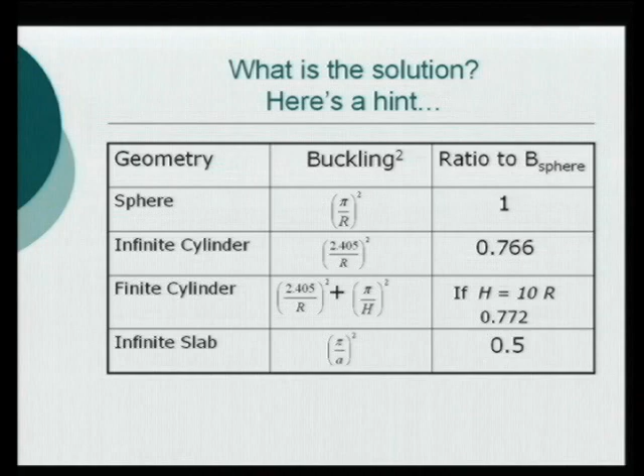But with a long cylinder, we can get as much power-producing volume as we want. So, very generalized here, what I'm looking at is an elongated cylindrical geometry. Our core is the necessary pretty small diameter, about 1 meter.

This can be as simple as just a pipe carrying the fuel salt, or it might have graphite elements in here as well if we choose to, surrounded by a blanket salt. So about half the neutrons, actually a little more than half, will leak out of there into the blanket salt, be converted into uranium-233, which we can quite easily transfer into the fuel salt. At the end, we can crimp down this inner pipe, which makes it sort of subcritical here, and any last neutrons emitted can still get out into this blanket.

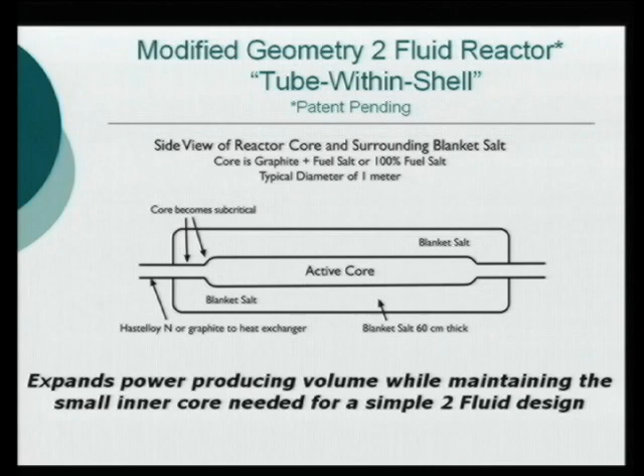So in this very simple design, we can have almost no neutron leakage. That fully encompassing blanket is really important for allowing all kinds of useful design changes. The new concept's advantages include using simple two-fluid fuel processing without that plumbing problem that plagued Oak Ridge for so long.

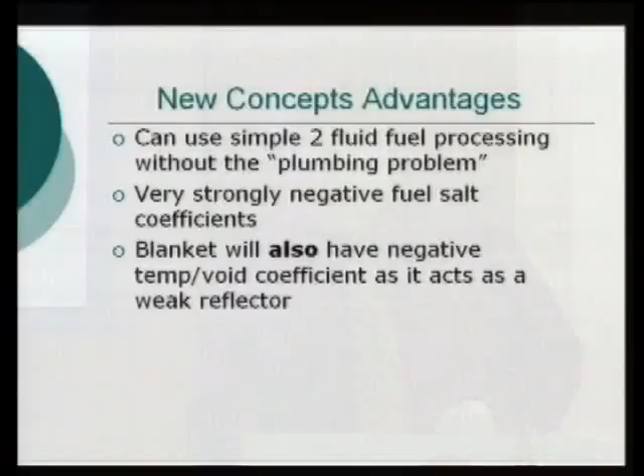It has very strongly negative fuel salt coefficients, which are great, and Oak Ridge always liked those. The blanket salt should also be slightly negative, but Oak Ridge's design actually had a blanket salt coefficient that was slightly positive, because if it heated up, some of it was leaving the core. In this case, there's none in the core itself, just around it, acting a bit as a reflector, so when that gets less dense, less neutrons will be reflected back, and it can slow things down as well.

Very simple designs to build, transport, etc. Ease of modeling and prototyping—these are so simple we can probably model them in 2 dimensions almost. And very low fissile inventory. The two-fluid design of Oak Ridge already was lower, about 700 kilograms, but they were wasting a lot in what we call plenum spaces at the top and bottom. We could easily get this down to about 400 kilograms per gigawatt electrical, or even lower.

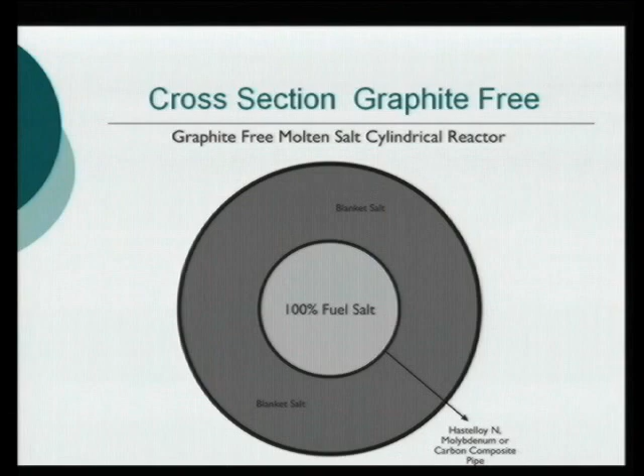Showing a cross-section of graphite-free, meaning we don't have any solid moderator. It's basically just a pipe within a pipe, sometimes called tube within shell, a heat exchanger term. Now we do need a barrier between the two, like Oak Ridge often had. That could be hastelloy perhaps. Molybdenum is a great material neutronically and for radiation damage, but really hard to work with. Or maybe just simple carbon composites or silicon carbide, etc. A lot of choices here.

Just to show some numbers, and I can back these up—I do a lot of data mining, taking studies done by Oak Ridge, the French, the Russians, Japanese, Czechs, et cetera. In their studies, Oak Ridge studies for a 122 centimeter diameter sphere with 0.16% fissile concentration, that should be able to reach break even long term. If we extend that to a long cylinder geometry, that shrinks down a bit to just under a meter in diameter.

And if you put in the basic power densities—actually these are quite conservative numbers, 200 kilowatts per liter, fairly slow salt speed, 2 meters per second, typical inlet and outlet pressures—a 6.6 meter long core gives you over 400 megawatts electrical just there. Now there's also other ways that give you larger diameters, and that would be for the same length, more power.

Now other variations—if we allow that concentration to rise a little bit, we end up with more excess neutrons to deal with, so we can start thinking about putting a metal barrier in there, molybdenum or even stainless steel. We can start thinking about alternate carrier salts that are a little less expensive, etc. And it gives us even greater simplification of fission product processing because we can leave them in a lot longer—we have more spare neutrons. And just like the French work has shown, going to 20 years or beyond for removing fission products.

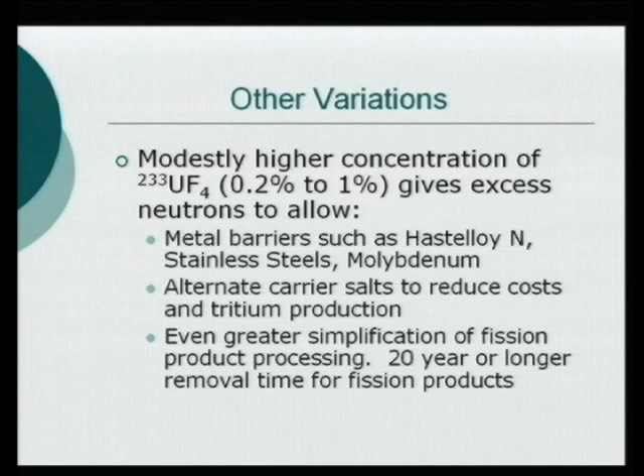But we benefit from the fact that there's a lot of work in the fusion field that has a lot more funding using these same salts as a coolant, and they have that first wall which is the most hostile environment you can possibly imagine. So they've been looking at a lot of materials with both the salts and a high neutron flux—molybdenum, silicon carbide composites, or even simple carbon composites. They're leading candidates, and one important thing to mention is they have to have systems that are completely impermeable.

We do not care if gases leak through these, because both the blanket and fuel are making a little bit of xenon, etc. So we don't need impermeable as long as there's not liquids really leaking through. Now, hastelloy and stainless steel are shown to be possible if we lower the temperatures a bit.

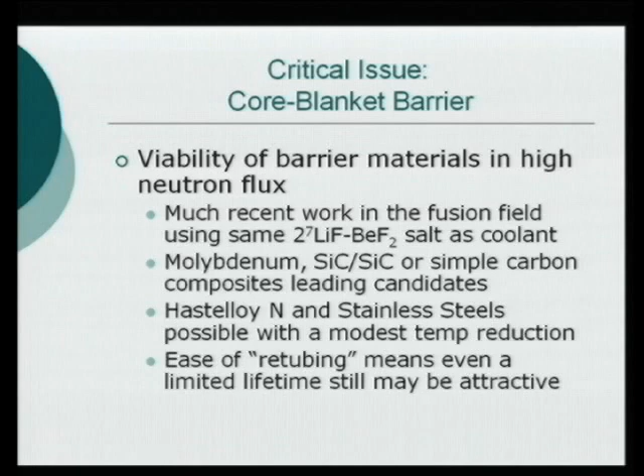That's not really too big of an issue. It is a bit hard to make sure we have salts that have a low enough melting point, but if you lower the temperature a bit, we can really start to consider using stainless steels or Hastelloy. Ease of retubing means, well, even if your barrier doesn't last forever, it's not going to be that expensive to fix.

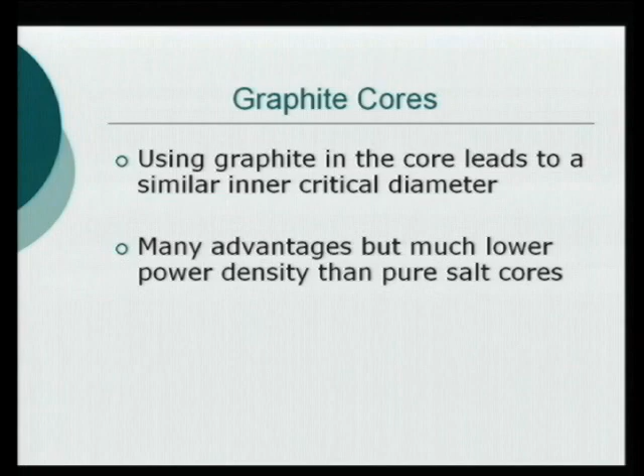Now graphite cores, adding graphite in there has some advantage. It's going to have a similar diameter actually, but it does lower the power density because it's not all salt — it's only about 10 to 15% salt then. But I just want to show an embodiment, an idea that has no real barrier material in a neutron flux, because we know the metals can survive outside in contact with the salts, but it's the neutron flux that's the issue.

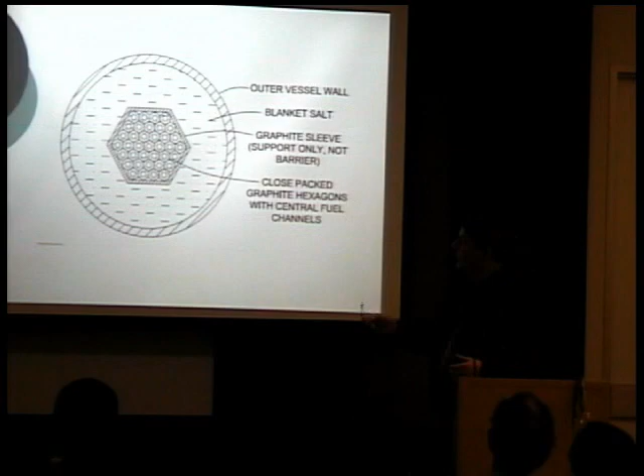So one of the ideas I've been looking at is having a simple system here where it's our typical sort of hexagons of graphite with central fuel channels. This is just a graphite sleeve, something to hold all those hexagons together, surrounded as usual by a blanket salt. But how do we get to the outside world? That's where things are a little more interesting.

So you might be saying, oh, well, that's back to the plumbing problems. But we have blanket salt between those pipes, so we don't care if they're expanding and contracting. It's not really going to change the overall criticality of things or the overall ratio of things. So just one of the suggestions here.

Now moving on beyond this two-fluid approach, if the barrier does prove a possible stumbling block, what other options do we have and still try to break even here? Looking at a barrier-free, fuel-processing-free approach — can we run break even without a barrier and even without fuel processing? Now a harder spectrum does allow you to leave fission products in a lot longer, so maybe we can get up to the 20, 30, 40 year range.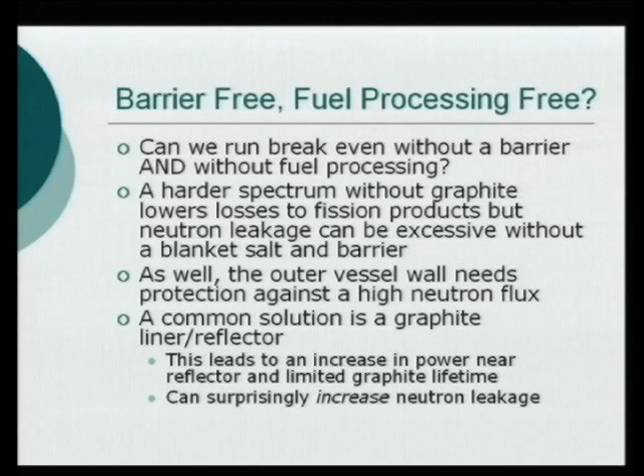As well, the other thing we have to keep in mind is that outer vessel has to be protected against a high neutron flux. A common solution, if we're talking about a tank of salt idea here, is putting a graphite reflector — that sort of protects things. But it's a very surprising result that this can actually start to increase the neutron leakage, because what happens is you get a much bigger increase in power at the outer edge. I'll just show you a quick graph here.

So what have I come up with? The idea is we have a very simple sort of tank of salt here. We have a graphite liner, but in that graphite liner we embed a lot of thorium — very simply, we don't have to use complex solid fuel methods, just thorium carbide or even thorium itself in the graphite. That thorium is going to absorb a lot of neutrons, and basically it's not a reflector anymore — it's absorbing those neutrons. Now, just like the Russian work has shown with graphite reflectors at Oak Ridge as well, we usually put a little bit of cooling channels in that graphite just to keep it at cooler temperatures.

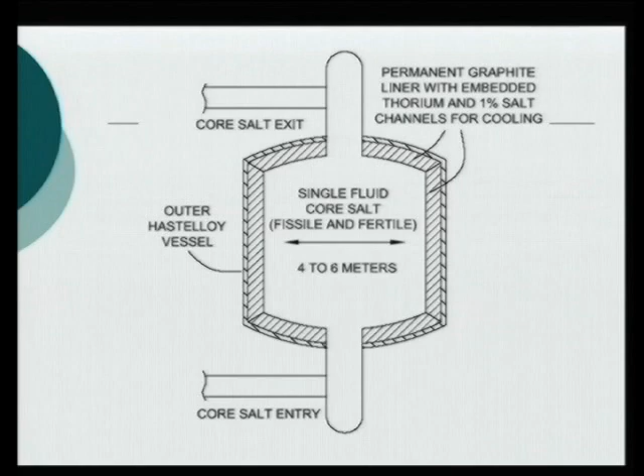In that design, what I call a liner equal to blanket, the core salt is a single fluid, potentially denatured with U-238, especially in the harder spectrum. U-238 doesn't hurt you as much.

In the early years of operation, the liner is almost completely absorbing. That means you're losing neutrons, but we don't have very many fission products yet, so the neutron budget should still be fine. As fissile U-233 and or plutonium start to build up in that blanket, it's going to start making more fissions there, which will increase the power a bit, and also start reflecting back more neutrons, which is what we need because we're having more fission products to absorb neutrons in the salt.

So ideally, we could make this liner permanent. We don't have to replace it, or at least have it last, say, 20 to 30 years with a midlife refurbishment, and also, hopefully, without any fuel processing whatsoever.

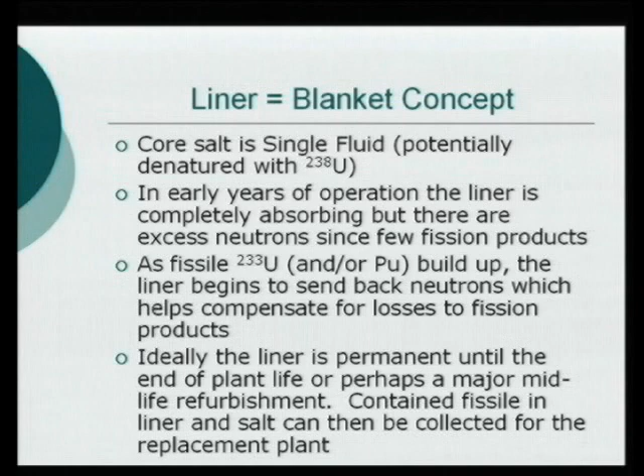Now, this is a very early stage, requires a lot of modeling, it's quite speculative. The graphite lifetime and the ability to get rid of fuel processing definitely goes up with the core diameter. If you make this absolutely enormous, it will definitely work, because the flux at the wall goes down with power density.

So if you have a really big one, that's low power density. But the question is what diameter would be needed to give you the full 30 years or more in the graphite and be able to forego fission product processing. If it's too large, that just might mean too much fissile material needed to start these up.

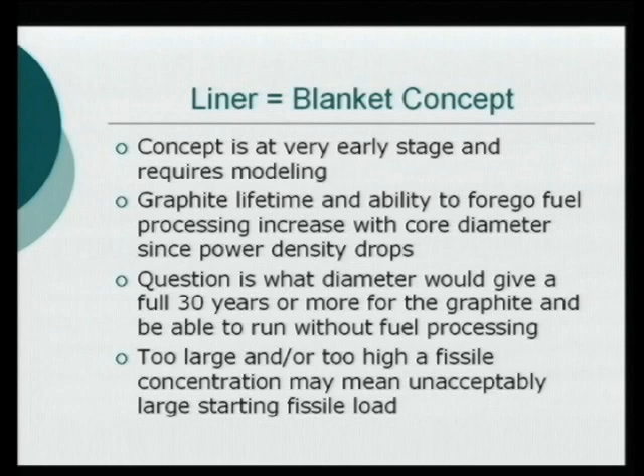The third and final thing I want to talk about is what's called converter reactors, or denatured molten salt reactors. The starting premise of this is from Oak Ridge, what they call the 30-year once-through design, from a report called ORNL TM 7207.

I should mention there's a massive amount of data out there for people to learn on their own through the Oak Ridge Library, or also through the website Energy from Thorium, which has dozens and dozens, if not hundreds, of different documents available for people to download, and discussion groups. You can train yourself, talk to other people, learn things, contribute, etc.

But getting back to this work, it was a 1,000 megawatt output. It was started up on low enriched uranium, so as long as you're less than 20% U-235 with thorium, no salt processing whatsoever was needed, just some simple chemistry control. It wasn't a breeder, but you just add small amounts of low enriched uranium manually.

Low power density, so the graphite would last the full 30 years. It had a similar startup fissile inventory to a light water reactor, and averaged a conversion ratio, which is the other term for breeding ratio, we use conversion when it's less than 1, of 0.8.

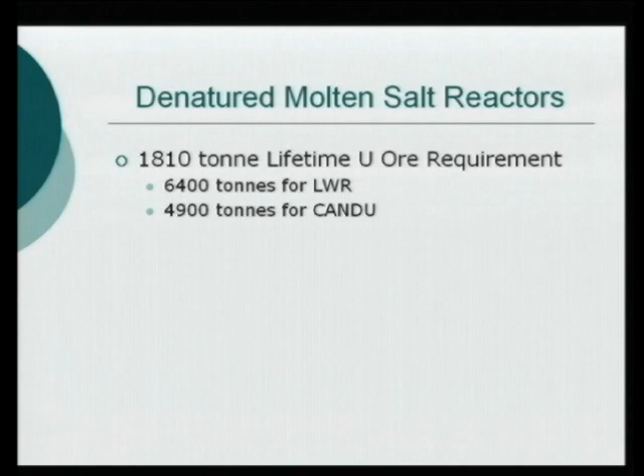Now, looking at the lifetime needs, it only needed about 1,800 tons of uranium lifetime. That's less than a third of what a light water reactor would need, and much better than even a CANDU, which has advantages over the light water reactor.

And at the end of the 30 years, it's very simple to remove that uranium. So we just remove that uranium and recycle it maybe in the next reactor. That lifetime ore drops down to 1,000 tons, which is getting really, really good here.

The transuranics, Oak Ridge didn't really have too much concern about back then. We really should recycle those. They're harder to remove, but we can do this one time only, bring as many inspectors as we want in, bring the equipment in for 3-6 months, and process out all those transuranics, putting them in the next core as well.

And if we do that, assuming the typical 0.1% losses, you're only talking about losing a kilogram of transuranics to waste in 30 years. That's as good or even better than the pure cycle where we're processing every few months, 6 months, or a couple of years. So it's a very exciting design.

What are some suggested improvements looking at modern technology or modern priorities? We might look at graphite pebbles, a pebble bed where the pebbles are just graphite, very, very simple and cheap. That removes the need for what's called flux flattening. You don't want any part of the reactor too high power or the graphite doesn't last long.

Pebbles can be moved in and out, so we can go to higher power densities if we like, because we can move those pebbles in and out very simply.

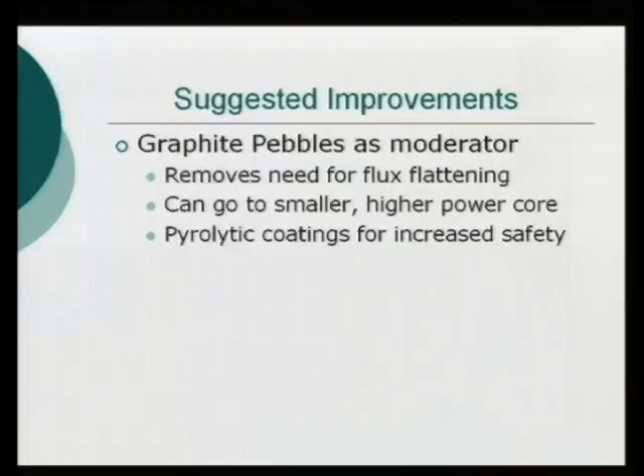We can put pyrolytic coatings on the graphite for increased safety. Higher power density means smaller cores - say we make the core half the size. The graphite will only last 15 years, but you're using the same amount of graphite over the long period. That lowers your starting fissile inventory and starting capital cost, just at the cost of replacing it every 15 years.

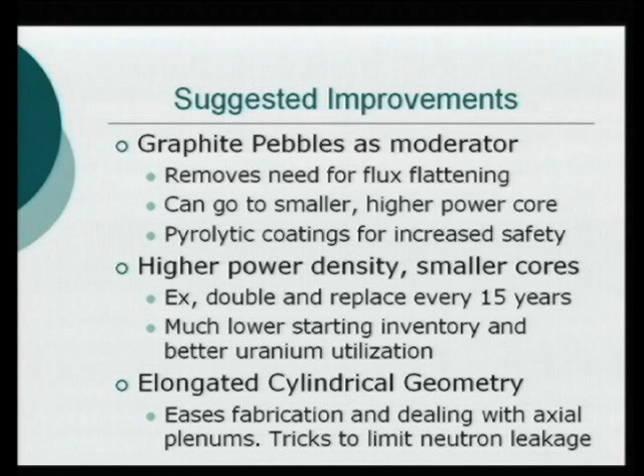There are advantages to using elongated cylindrical geometry. It eases fabrication and dealing with what's called axial plenums. And there are tricks to limit neutron leakage that Oak Ridge came up with in these single fluid designs.

Going graphite-free, getting rid of the graphite, going to just a simple tank of salt here. We can retain a softer spectrum if we want - we just go to lower fissile concentration and let the salt itself moderate the neutrons. So we can do a lot of things in that design.

What's also quite exciting for me is looking at alternate carrier salts. The traditional carrier salt is called FLiBe - based on fluorine, lithium, and beryllium. There are problems with that. The beryllium is a bit toxic. It produces tritium, which is really a pain to deal with - not impossible, but we have to catch that tritium and make sure it doesn't get out, because tritium can move through metal walls if they're hot enough.

So we can switch to perhaps sodium beryllium fluoride. It was always sort of Oak Ridge's second choice here. Very low cost, low melting point, so we might be able to lower the melting point enough that we can start thinking about using stainless steel throughout. Nickel alloys are fairly expensive, so if we could go with simple stainless steels, that might save a lot of money.

Another one that's not as well known is sodium and rubidium fluoride, along with uranium and thorium of course. It's really low cost and no tritium production at all. Beryllium and lithium are the things that can make tritium for you - if we get rid of those, that can really simplify things. A lot of people have been telling me, though, with the gas cycle, we have a lot less to worry about with tritium leakage.

And then probably the most exciting is just sodium fluoride. Dirt cheap. It does have a bit of a higher melting point though, so we're sort of pushing the limits here, but a lot of advantages there.

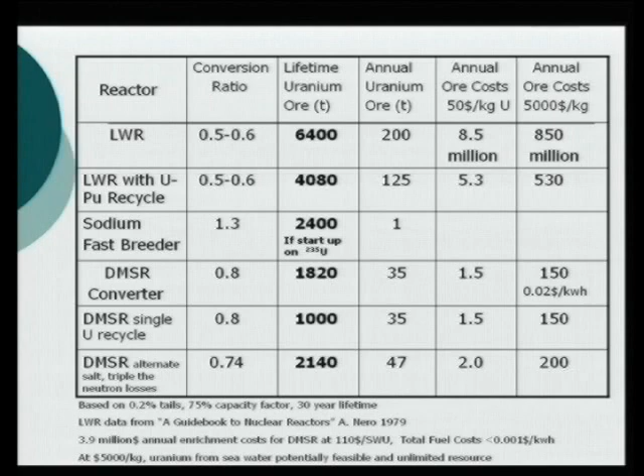Even if you imagine a 100-fold increase in the price of uranium, you're still only talking $150 million a year for fuel, which is only 2 cents a kilowatt hour. So we could imagine all these potential resources of uranium if we allow the price to rise that much. This really gets down to the argument of peak uranium - just like peak oil, people think maybe we're actually running out of uranium, especially if we try to get designs with a lot more reactors using this.

And also the sustainability of uranium mining, which a lot of people don't think is the nicest thing in the world. But as shown, even with an enormous price increase, there's little effect on the fuel cost for the denatured molten salt converter reactor.

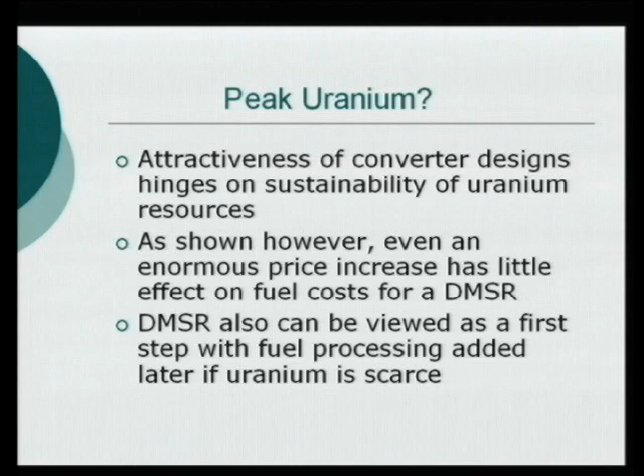And we can also view that as a first step. We can add fuel processing later if uranium does prove to be scarce or we don't like the uranium mining.

So some conclusions here. Molten salt designs have inherent features that favor overall safety, waste reduction, low cost, and rapid deployment. They also have great flexibility to match different priorities, mainly on proliferation concerns. We can change these in ways that make them so much better than anything out there now. So they can change to meet priorities.

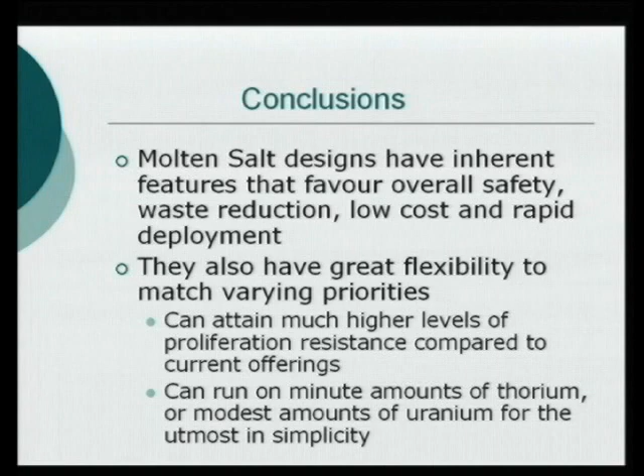We can run these on minute amounts of thorium or more modest amounts of uranium, but at the advantage of utmost simplicity. Now, what way forward?

It is very difficult to attract corporate interest on designs like this. Was back in the 70s, will be now. Corporations would have no lucrative fuel fabrication contracts that they can plan on making money for years on end. Starting any new design, or something that hasn't been built to commercial size yet, it's a minimum maybe about a 15-year return on investment, which is a hard sell to shareholders.

And the existing nuclear players have their choices in place. But as I said before, they're not doing too well with those, so maybe we can change some of their minds.

Other corporate players, big oil. They're making massive profits, but they're more and more agreeing with people about the concept of peak oil. Maybe within 30, within 50, within 100 years we're going to run out of this. Maybe at the price of some of their profits now, they can still be the big players in the energy field by investing in these concepts now.

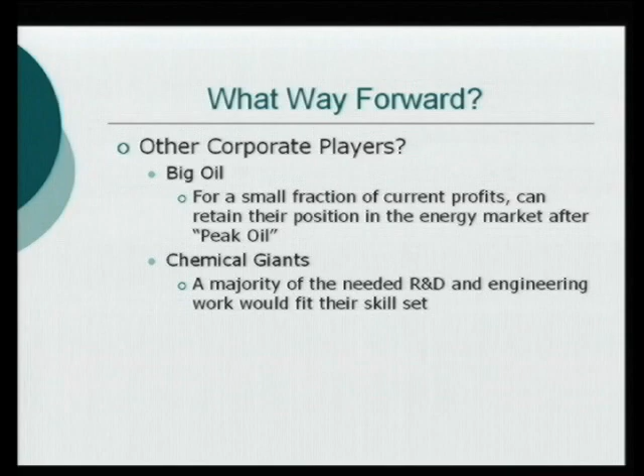Also the chemical giants. A majority of the work on these is chemical in nature. They're more chemical plants than nuclear, so they would have an ideal skill set for fitting into this. Individuals with deep pockets, people like Gates and Branson, Allen and Buffett, etc., they're looking for ways to invest in the future. What better way than something like this?

We need to get the ball rolling, and that's really the difficult part. Now, I really think international cooperation here is key to spread the cost and also spread the rewards. The ITER model, ITER being the International Thermonuclear Experimental Reactor, really showed a way for different countries to work together on something that was expensive but very important. So maybe that's a rough guide, but with a lot more corporate involvement.

This is quite speculative, of course. And there's likely no one design that's going to be best for everyone, all nations, or all utilities. So it's really best to move forward on several different designs, even things like molten salt cooled reactors. A lot of their potential research and development is going to be applicable to everyone. And there's nothing like competition to yield the best results.

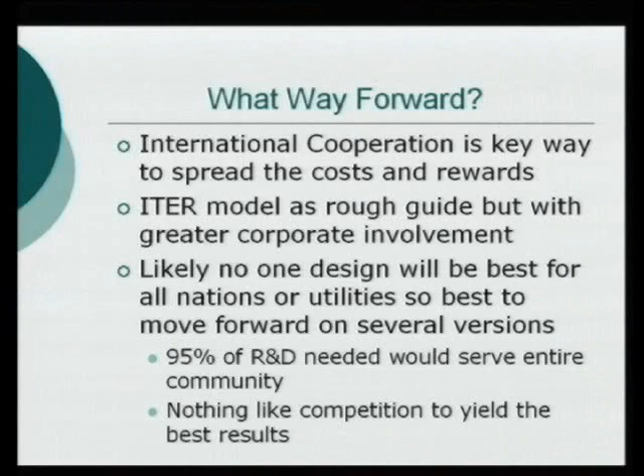So what's needed in the short term? A lot of things, a lot of neutronic modeling—a lot is being done, but we need a lot more done. A lot of fuel chemistry work and corrosion studies on various carrier salts and the materials for heat exchangers, etc., and potential materials for a barrier.

Researchers around the world would love to work on these. The more people I talk to, they would love to work on it, but there's just no real funding stream available now. We need to get that going, and that really is the hardest part of all. That's what I'd like to talk to you about today, so open for any questions now.

Well, it depends on your rate. Oak Ridge often had all these time frames. If we want to get this out in 30 years, they're always quite conservative there, not spending that much money—over 30 years, spending only $1 billion or $2 billion, and those numbers are a bit dated. It boils down to manpower and money; the more we can get in, the faster things can go. It depends on the complication level we're looking at. If we're looking to build really simple converter designs, they're basically identical to what Oak Ridge built as a test reactor, so we could maybe save a lot of time there.